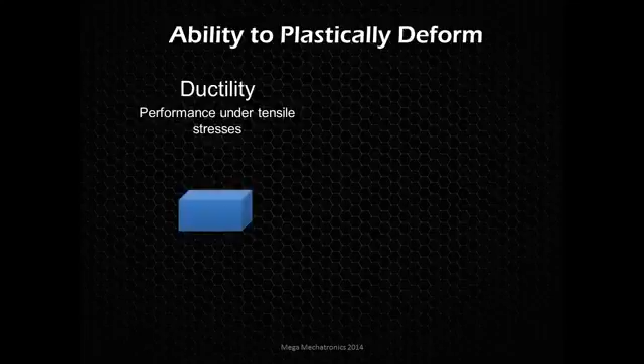Looking at the technical term of ductility, that's the performance under tensile stresses, and malleability is the performance under compressive stresses, where we're trying to crush it together.

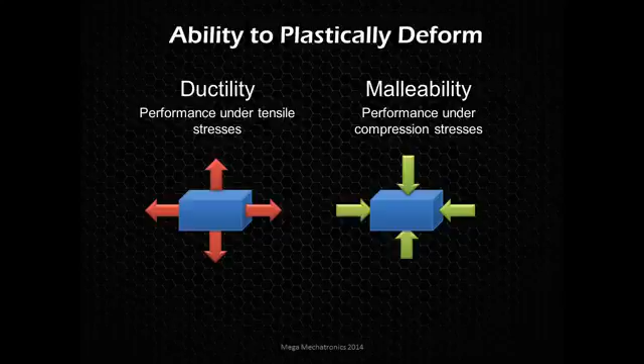A highly malleable material would be something like gold, where you can keep pounding on it and crushing it, rolling it, whatever, till it's 1/1000th of an inch thick, which is about a quarter the thickness of a piece of paper. You think paper's thin, gold leaf is much thinner. The reason is the gold atoms stick together, pun intended.

But ductility is the general term that we use to describe the plasticity of materials.

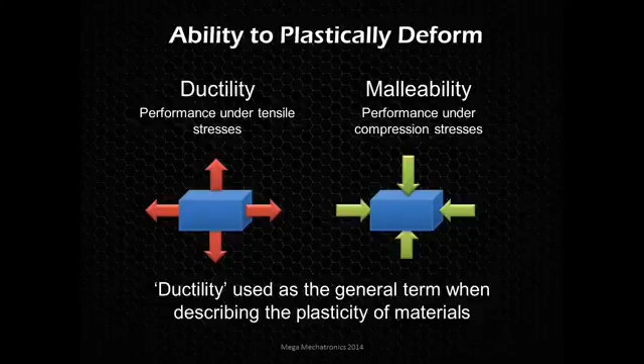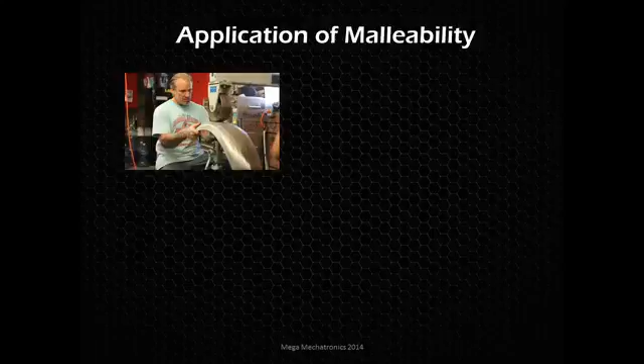Here's an application of malleability, so we're crushing the material. You see an English wheel here, applying pressure between two rollers, and you roll that material through. It does stretch it out a little bit as well, but you are applying a compressive stress to that material. So that fender he's working on started off life much flatter, and you can see it's taken shape. That takes a lot of skill.

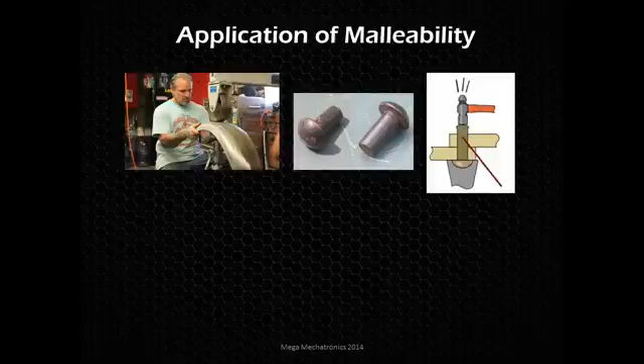Here's a rivet, and it's important that rivets don't fracture or break when they're put under a compressive load. Here's a side profile of a rivet, and you see there's a little die at the bottom, and we're hammering and deforming the other end to create a fastener. Rivets have actually been around since the Bronze Age, at least 2,500 years ago.

Here's an application of rivets on a motorcycle chain. Each of those cross pins has been riveted in, and you see someone here manually riveting a master link in there to complete the chain.

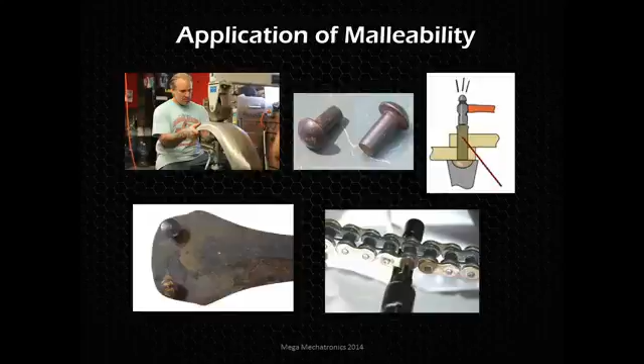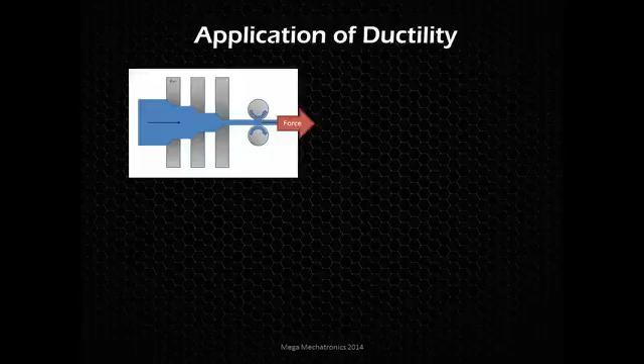An application of ductility: here's a wire drawing process. So we're pulling some sort of wire. The dies and the size of the material are quite exaggerated here, but just to show you, we're pulling it through - we're not pushing it. If we're pushing it, we'd be extruding it, but this is drawing. So as we pull the wire from a coil stock of a certain size, and we add some lubricant, pull it through a die, we're stretching that material out. And it is cold working that material as well.

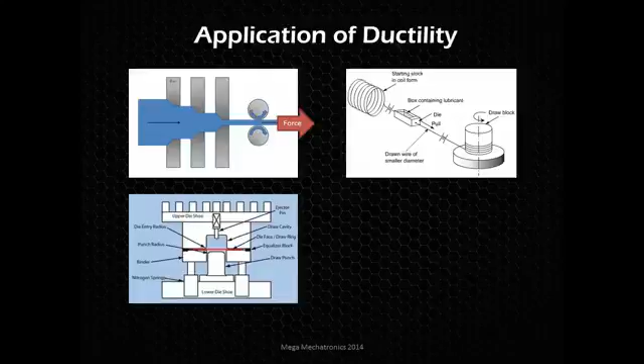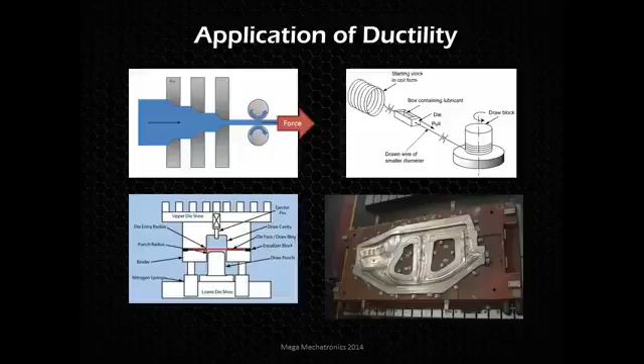Here's another form of ductility: stamping. So we have a flat piece of sheet metal, and then we put it in a die, and those dies press together. You can see an example here of a side panel or aperture of a vehicle, and it started life off as a flat piece of metal, and then it was stamped out and formed, and also sheared. You can see there's some shearing going on there.

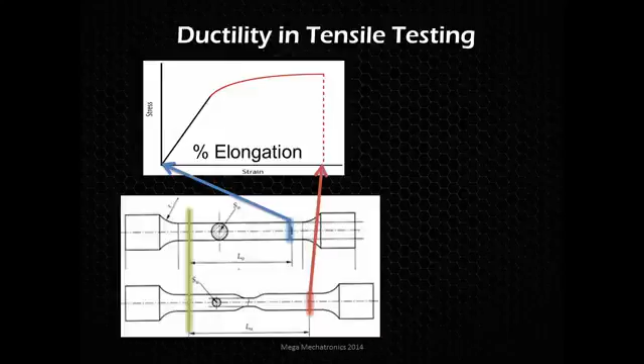So we can derive a good idea of ductility from our tensile tests. We start off here with a strain of 0, and then we pull it across until the breaking point, which gives us the percent elongation, the maximum strain if you were to take that off of the stress strain curve. But it's not a perfect measurement because it does depend on the initial length that you're using, since there's more change in the middle where it fractures than on the outside.

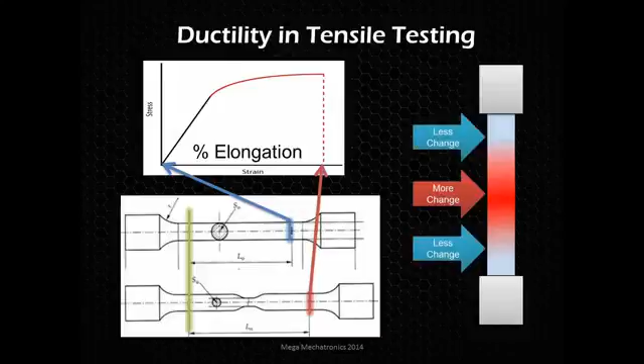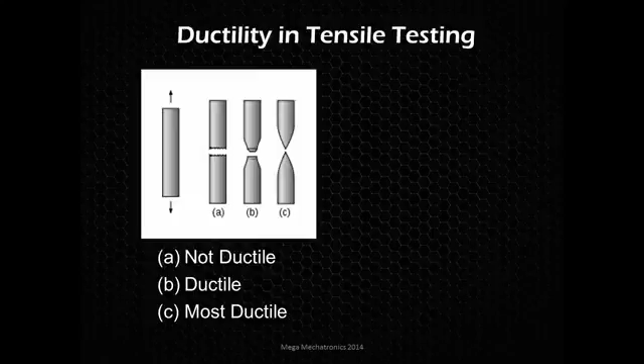So a better way to gauge ductility with our tensile tests is to measure the necking. You see in A, it's quite brittle, there's no necking, no change. B is what we expect from a ductile fracture, and then C is like the ideal ductility example, the most ductile.

So to calculate that, we need to find the reduction of area. It's similar to the strain calculation where we're looking at the percent change in length - here we're going to find the percent change in area. So we're taking the change in area, dividing that by the initial area to get our percentage change. To find the change in area, we need to know the initial area, and we minus that from the ending area, which gives us our delta change, and we divide that by the initial area, giving us a percentage reduction of area.

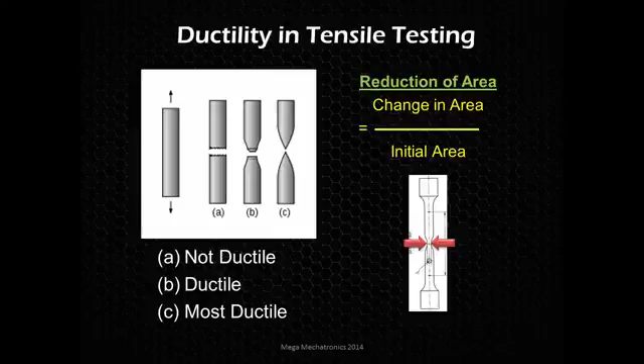So let's look at some examples of some materials and these parameters. Looking at 1141 steel, we're at 12%, 47% reduction in area. 4130 steel, 11%, 43%. They're pretty close, but you can see the 4130 is quite a bit stronger. You'd probably prefer that material over the 1141 because it has similar ductility and toughness, but it is quite a bit stronger.

And 9255, that's a bit harder. It is very strong, but not very ductile. And then you see the 304, 431, huge difference. So I'm trying to show that the material alloy makes a big difference in ductility, and what makes an even more difference in ductility is the heat treatment to that steel.

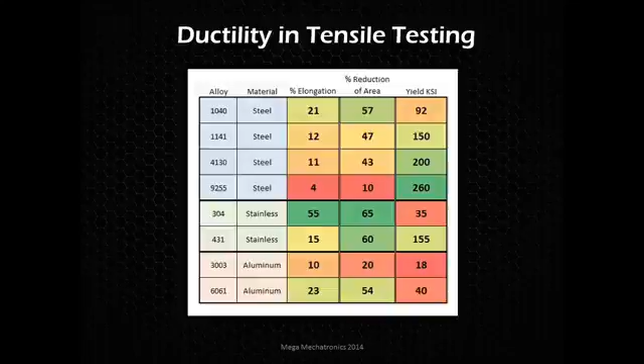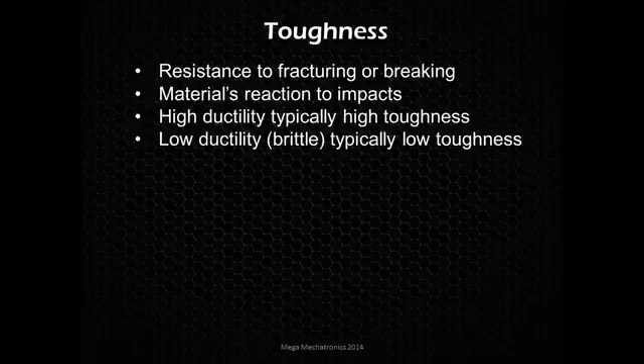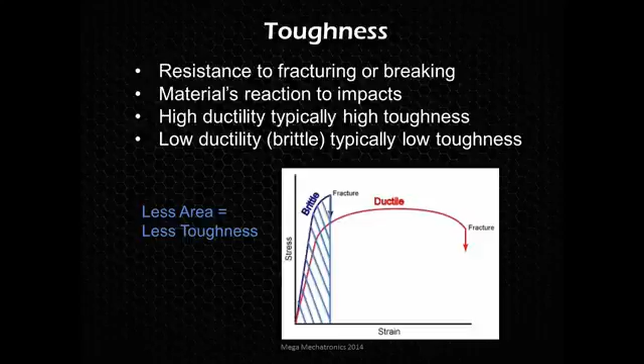Looking at toughness, this is the resistance to fracturing or breaking, how it reacts to impacts. Typically, the more ductile the material, the more tough it is, but not always. Low ductility usually means low toughness, but a better indicator is the area under the stress strain curve. If you look at a brittle fracture and draw a line down where it breaks, we can see the area there. Now if we take the ductile one and do the same thing, the material with more area will be more tough. So the ductile one is definitely more tough.

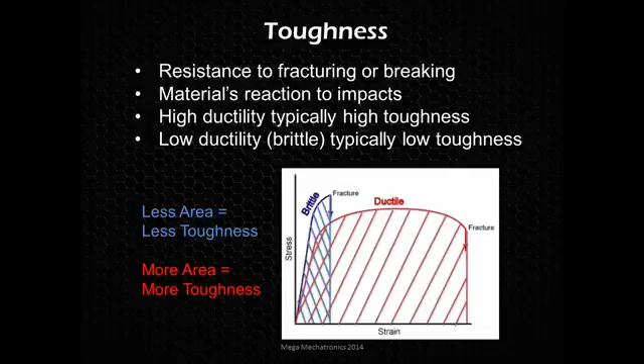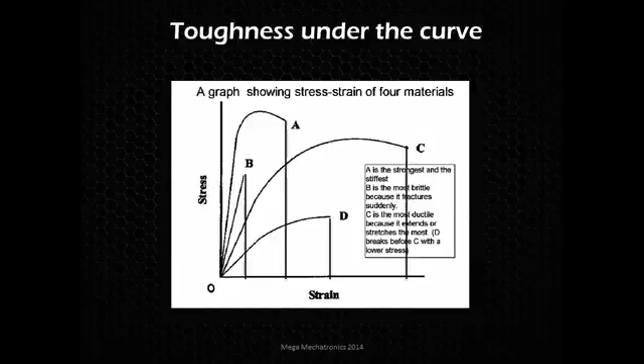Let's take another example with some stress strain curves here. Starting from the lowest toughness, just based on looking at the chart, we can derive a toughness. Looking at the area, B has the least amount. D, even though it's more ductile, isn't as tough as A, where the strength really makes up for it. And C, of course, is very tough, a very ductile material.

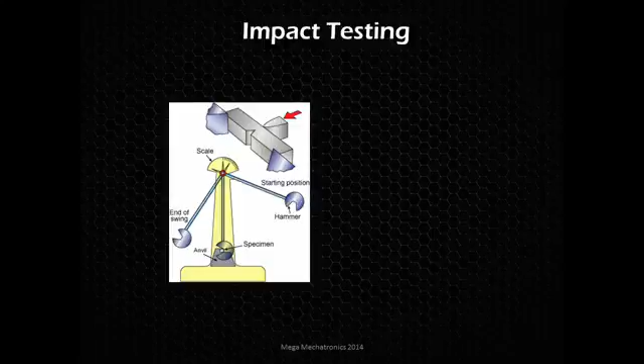To quantify toughness, we do impact testing. Here is a Charpy impact test. The pendulum swings down, hits the material, and then we measure the back swing to see how much energy was absorbed. If we free swing the hammer without a specimen in the way, it swings up to a certain distance. If we put something in the way, it swings through, breaks it, but the material absorbs some of that energy, so the pendulum won't swing as high. That's how we get the amount of energy absorbed.

Here is a very similar pendulum style IZOD test. You can see the Charpy specimen on the left, supported on both sides, and the striker comes right at the notch, right in the middle. Then we have our IZOD test, where the specimen is supported on one side and impacted at a different area.

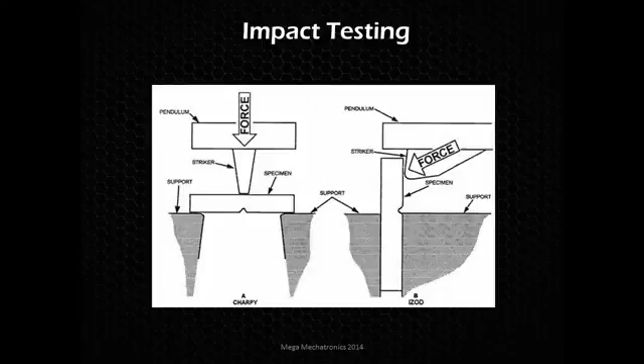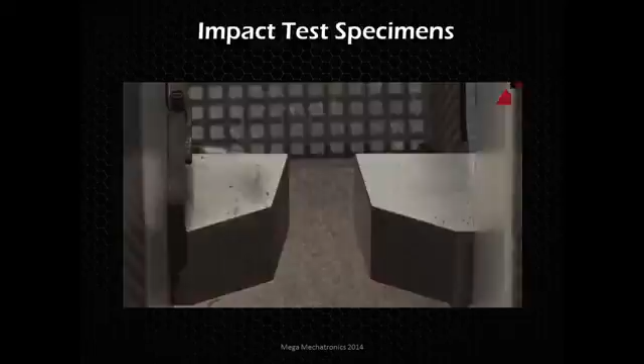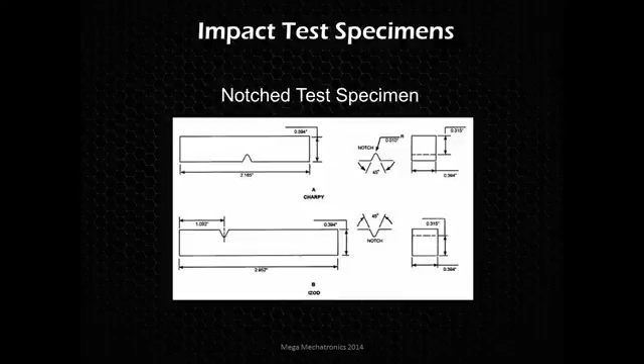Looking at the specimens, there is a notch in there. The Charpy and the IZOD are very similar. The IZOD is a little offset, so one leg is longer, but other than that, dimensionally they are similar. Here's a close-up of a real Charpy specimen.

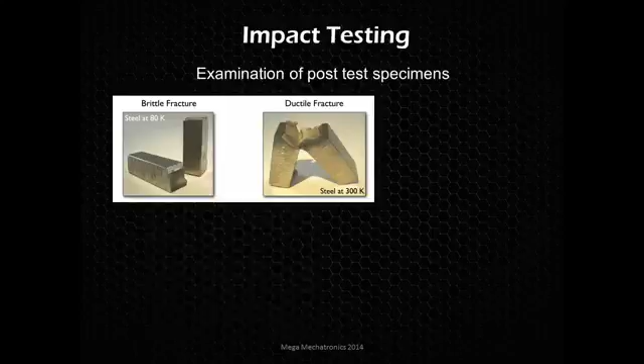We also want to examine the specimen after we fracture them. You can see these two steels are the same composition at different temperatures. There's a brittle fracture, it just breaks off with less deformation, and the ductile fracture shows some deformation. With this test, you can tell the one on the left is brittle compared to the one on the right, because the right one didn't even completely break, and you see how the edges are rounded and folded up, so plastically deformed, absorbing a little more energy.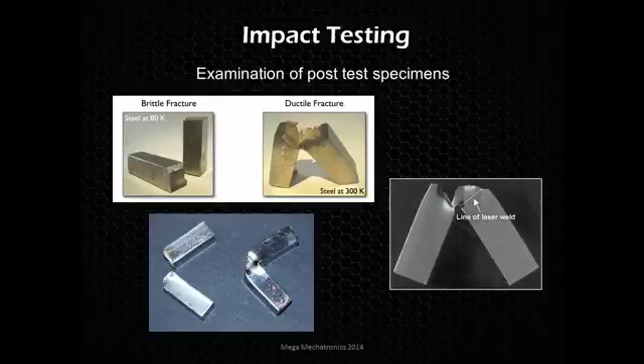With this impact test, we can also test manufacturing processes such as laser welding, other types of welding, heat treatments, and stress relieving. So we weld pieces together and try them at different heat treats to stress relieve them and make sure we don't have any brittle welds.

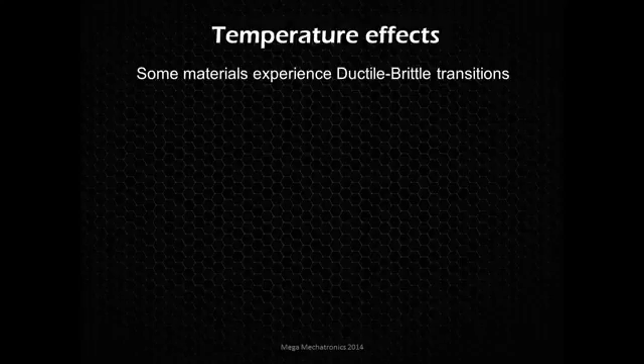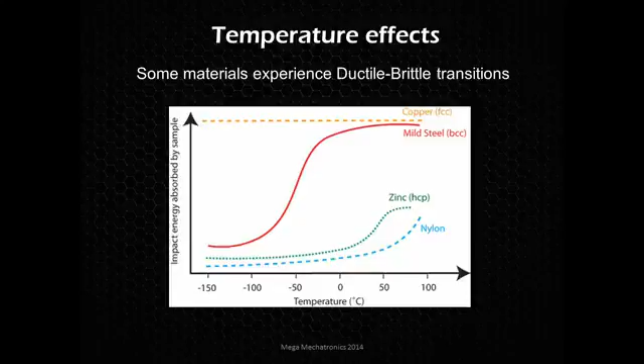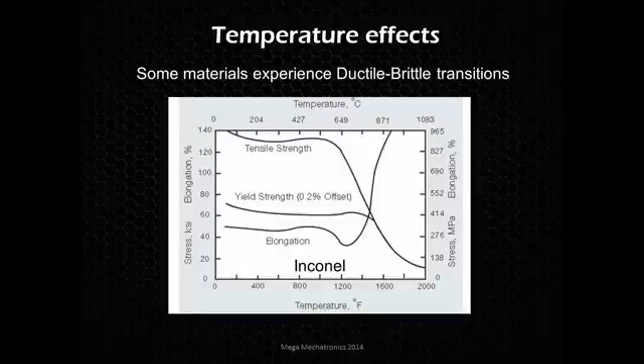We can take a look at this exotic material. It doesn't start losing mechanical properties until around 1,000 to 1,100 degrees Fahrenheit, possibly 500 degrees Celsius. That's a huge range, which is why they use it in jet engines, F1 exhausts, and I've even designed heat treat fixtures to heat treat valve springs using this material exclusively.

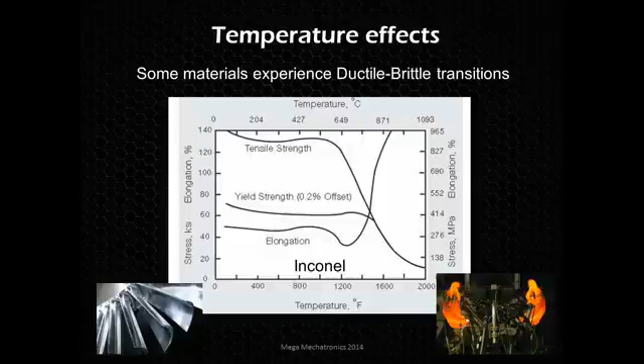That concludes our ductility and toughness video, and thank you for watching.